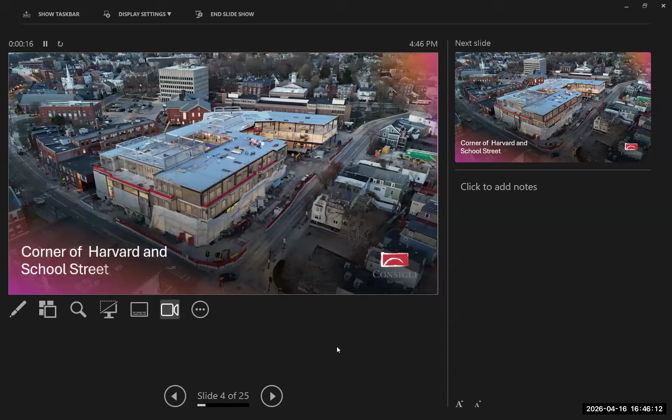All right, good afternoon. So we'll start with site activities right now. Over at Pierce Park, geothermal grouting has wrapped up, so right now the crew is working on all their circuits. We're actively working on circuit 6, so we've got 7 and 8 left. The geothermal vault arrived yesterday, so that's a big milestone to get that on site. That's sitting over at the old basketball court right now.

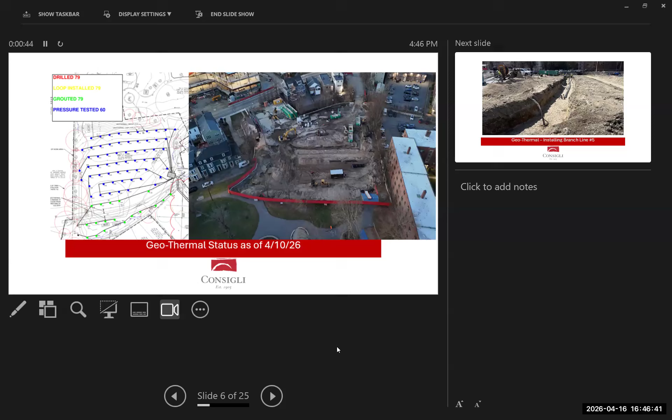Is that what we're seeing there? Yes, this is our geothermal area right here at Pierce Park. We're planning on starting excavation for the geothermal vault tomorrow into next week, landing that in the hole next Thursday or Friday. That's deep excavation, so a couple days of excavation, then we'll get that in the ground. Then they'll be hooking up all their circuits through the end of May. Then we'll start bringing that field back up to grade, and that'll be prep for all of our small foundations and stuff over there. So tracking well with geothermal right now.

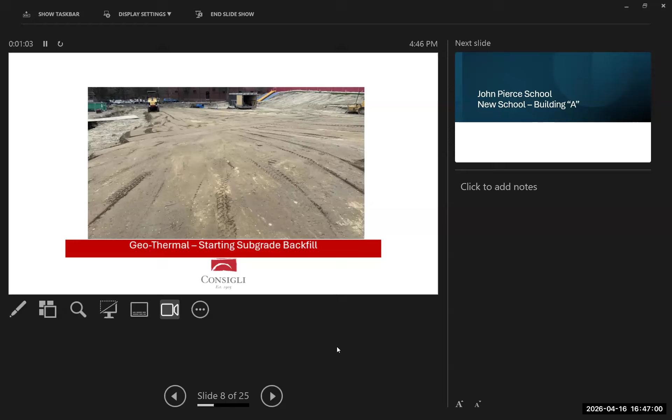Overall on the main building, we have our paving date for the garage for A and B on 4/30 and 5/1. We're gonna be down in the garage putting binder down. We'll let that cure up, and then we're gonna start all of our overhead MEPs, installing jet fans, lights, all of our devices on the walls. It's just a safer install, so we're driving towards that.

That is ongoing. Multi-purpose room, as you can see, we just wrapped up the last pours the beginning of this week. Now we just got the small ramp to pour end of next week, which gets you from the multi-purpose room up into the band room, and then we'll eventually get you out into the garage, so that's ongoing.

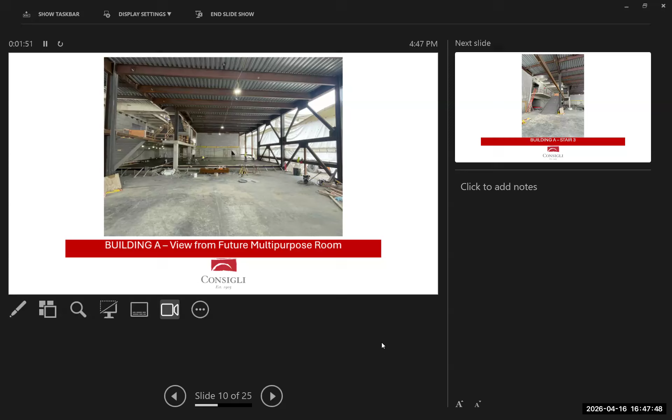All of our main big pours are wrapped up right now. Today we just poured stair 3, our last big stairs, stairs 2 and 5. Those will be access up and down the building, so all of our slabs are done now. We've got a few miscellaneous stairs left to do, a couple topping slabs, but we're in good shape with concrete right now.

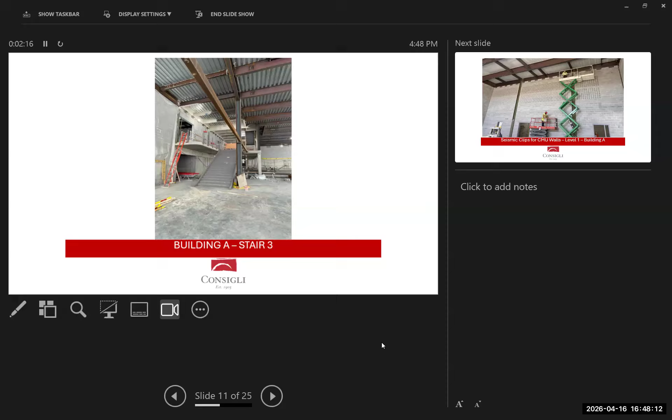Level 1, as we continue to go across, we're installing overhead MEP hangers, mainly focusing in the classroom wings, just so once we get a roof on, we can do all of our topping slabs and start our in-wall framing. Jumping ahead, getting hangers done over in A, starting in B building, doing all of our CMU for the divider wall. B building separate in the garage right now.

Going up level 2, still installing hangers, we're putting in our storm pipe right now, which will collect all the rainwater and get that out, so we'll have a dry building as we progress the roof. We tie in our roof drains, now we have a dry building, and we can start progressing more work inside. Big task right now is getting that building ready to receive the roof and be dry.

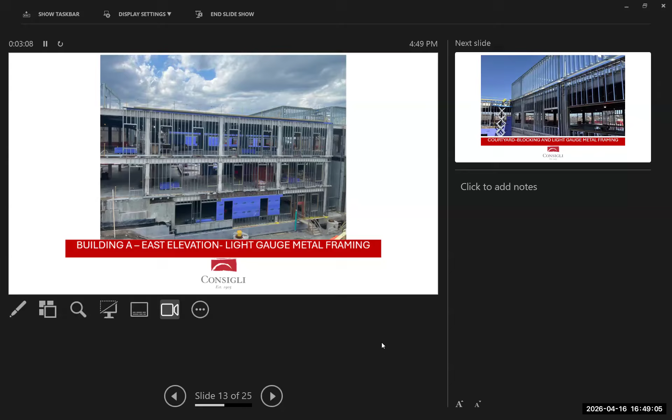Also courtyard building A, we're continuing to sheathe, put up all that purple sheathing. We have a bunch of framing in there, and then we'll start our waterproofing. The purple is just the sheathing, it's the gypsum board material. There's insulation behind it, you can't really see in that photo. The waterproofing is gonna go on top of that board, and then the more finishes insulation will go beyond.

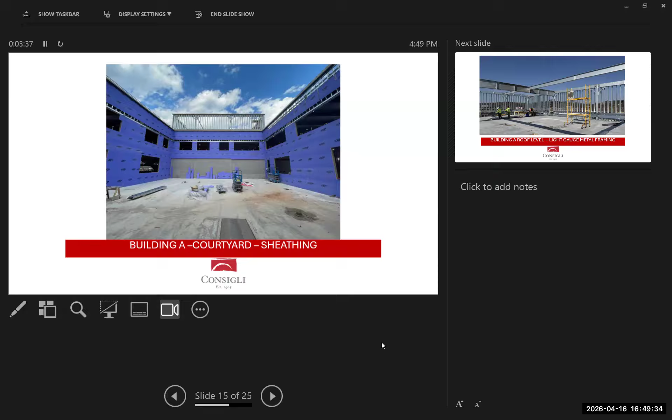So that's level 2, jumping up to level 3, really just pushing hangers up there for the storm system. Then going into B building, we're spraying all the exterior steel with fireproofing, and then the framing crew is gonna start next week on the east side of building B and start working there counterclockwise as we're working A, and we'll meet in the middle courtyard.

That's where the equipment is going up, that's the roof, the ceiling, and then our photovoltaics will go up on that. Yeah, so that's the screen wall where the units will sit. Right now we're doing the AVB blocking, getting ready to land the unit curbs. Once those are installed, we'll do the roofing, do all of our duct drops through the curbs. Looking like we're targeting July to land the actual units in the screen walls, both A and B building.

And then we'll do the rest of the remainder of the steel. There's about 40 members of steel left we've got to infill. We just had to leave them out to land the units. We'll get those in.

So for the solar to work, it needs to be solar ready, right? Not that you do the actual installation, but do those wires and stuff go up through here? We're gonna have the conduit stubbed up to the roof. The route to get from the electric room up to the roof will be in place. No wire yet, but there'll be a disconnect, and then when the photovoltaic person comes, they'll wire it back down to the existing infrastructure, but the infrastructure will be there.

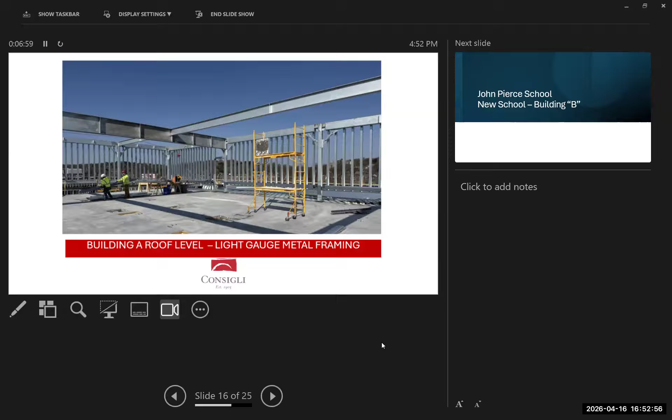Other than that, on the historic building, right now we're working in the back addition. We just did the mechanical pad today, so the plan will be to remove the formwork for that. This weekend we're gonna have a crew backfilling the two side wing walls on either side of that room. Then next step, we'll have one more pour to encapsulate the top - there's a little top and slabs to create a side bench basically in there, and then a front curb to pour.

And then we have the date of 4/28 to land, 4/28-4/29, to fly the unit over the building and land the air handler into the addition. Protect that, and then steel is slated to start on 4/30 for the addition.

So you're flying it in? Yeah, we'll have a crane out front, up and over. Yeah, flying it with a crane - we'll coordinate that with the town. The plan will be to fly the unit up and over the historic building, land it there, protect it, then start our steel, which will also be installed that way.

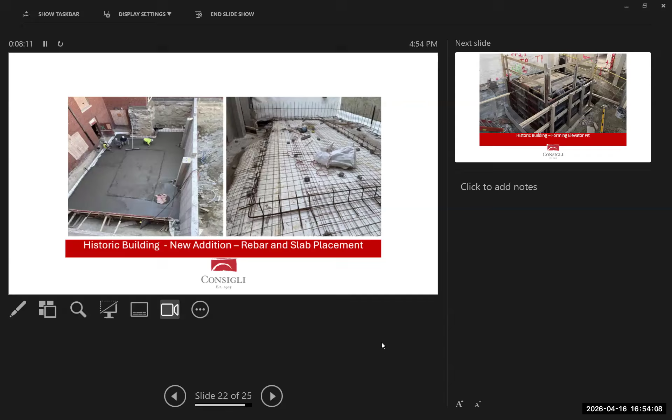Inside the building, they're doing all their rough framing right now, all their support framing. Also, we're looking to wrap up the window abatement, which is just removing the old caulking, next Wednesday. And then we have a crew that started yesterday doing all of our new window blocking, which will accept the new windows. Today we received the first round of window frames, so those are on site now.

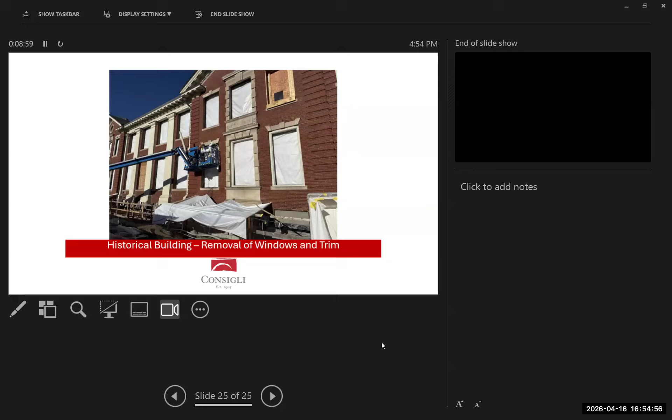The crew will do a mock-up of the two windows, actually at the doorway we just walked out of - they'll install the two windows, do the mock-up fit-up test, and then start production of installing blocking and windows going across the historic building. Other than that, we're doing the 4-inch wear walls going around the historic building, working on the north elevation right now. They're starting to waterproof the east, and then we just gotta close up the back and connect the dots.

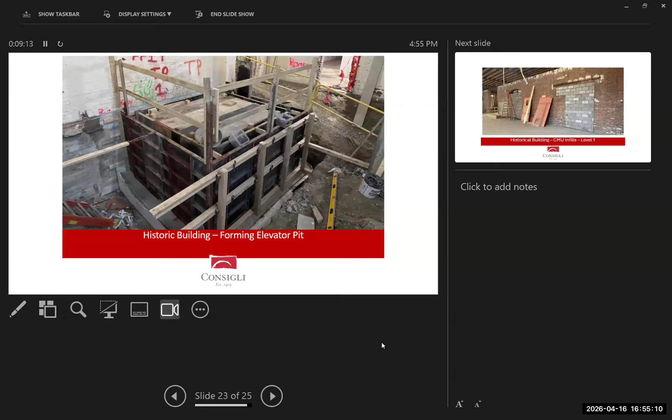That covers the overall scheduling questions. And then just a couple of masonry infill pictures right here, just to show everyone else in the room. And then this is the elevator pit that you all saw when we walked out there. And then just the spray fireproofing that Josh was talking about on the second floor over there.

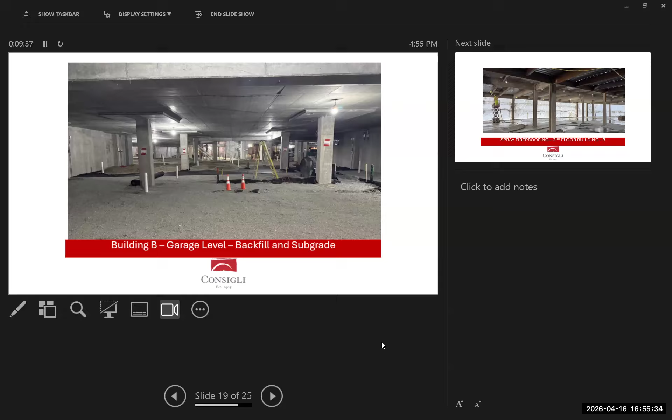And then this is the garage. I know we didn't get a chance to go down there, but as Josh mentioned, on April 30th we'll be paving this for the initial binder course and starting to install all the MEPs that go down here directly after that. And then this is that green ramp we talked about that connects School Street up to Pierce Street - this is what we call Blue Duct, very aptly named, as you can see. This is gonna eventually be a ramp that gets you from School Street all the way up to Pierce Street, but we need to get this ductwork in here.

It's exhaust from the garage. And where does it go out to? It goes out that hole you can kind of see in the upper left-hand corner.

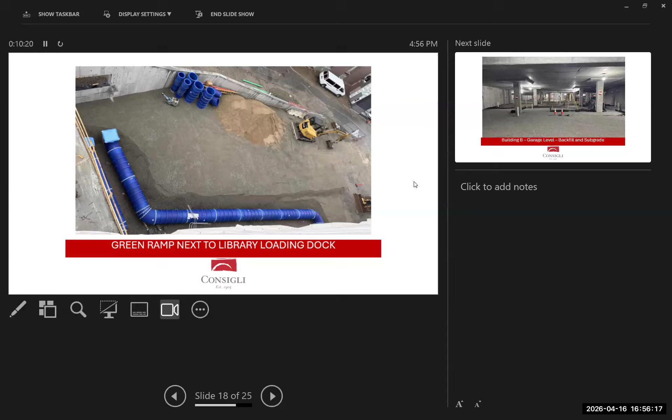So just wanted to make note of those items as we were going through. Are there any questions?

So we end up putting new windows in this whole building? Yes, in the end. Okay, I know that was approved, I remember there was a discussion about it. Yeah, they're actually here on site right now, so we're gonna start installing those in the next week or so.

So our building will be tight, really? It will be, yes, and all of our interior framing and walls kind of tie into those, which is why we had to wait to start installing all of that stuff. And the blocking around those windows was terrible.

And what's going in right now, if you look at those two mock-ups, it's fantastic. It's really the right thing to do. It's just solid, the windows are gonna be great, it's gonna be tight. What was there was just sketchy, and we had replaced those original windows. I'm not sure when they were done.

Are they the same configuration? They're as close as we could come. The original manufacturer no longer makes the model, so we're replacing them with the newer version, but the reason we were replacing them is because they ended up failing for you, so we're replacing them with new ones.

Over half of them. Are these aluminum clad, double hung, wood or aluminum clad? They're aluminum. They're operable, right? They're all operable, yeah. And there was a reason they were aluminum, so that they could be opened, because the other ones became so heavy. Are they single or double hung? Those are single, yeah.